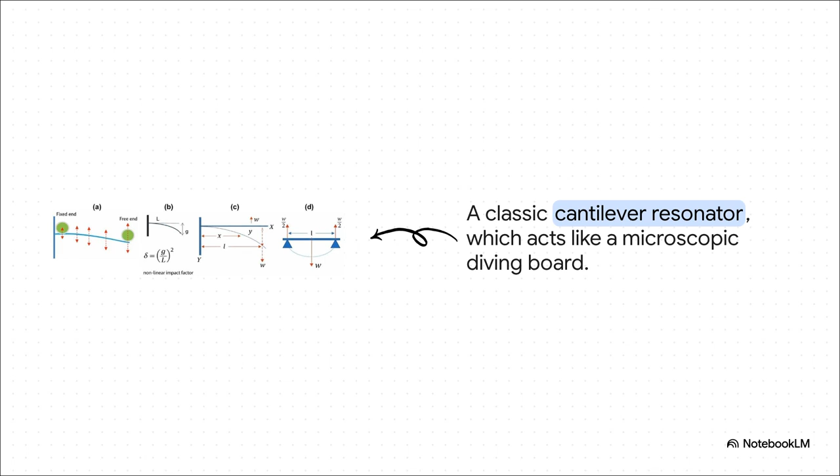For years, a lot of these sensors were built using what's called a cantilever design. The easiest way to picture it is to think of a microscopic diving board, just a tiny little beam that's fixed on one end and free to vibrate on the other. And right there, that's the problem.

Just like a real diving board, which bends and flexes the most right at the tip, a cantilever resonator's sensitivity isn't uniform at all. The vibration is way stronger at the free end. So a particle that lands there gives a totally different reading than one that lands closer to the base, and that leads to inconsistent, unreliable measurements.

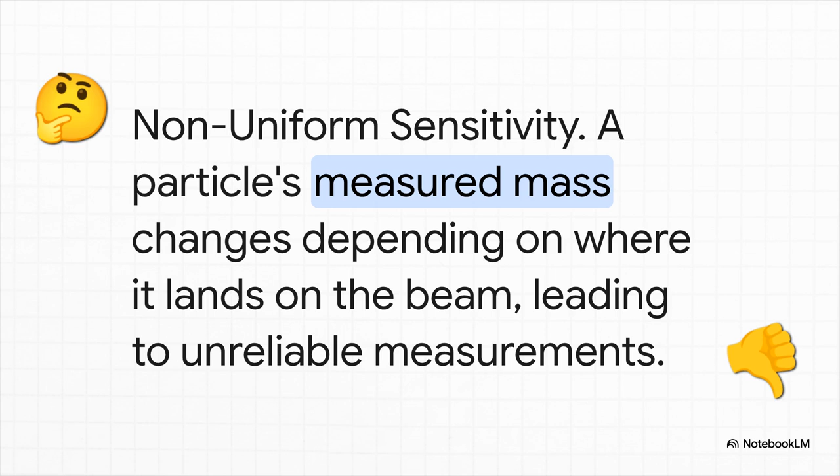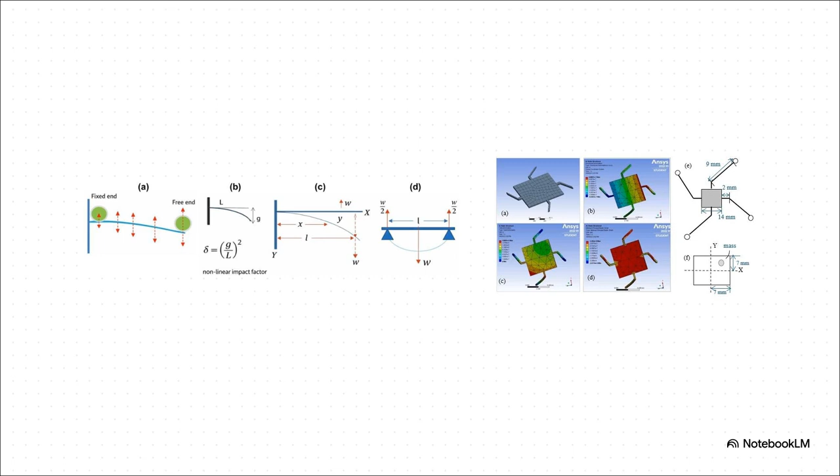Not good. So to make a sensor that was actually accurate and reliable, engineers had to go back to the drawing board. They needed to completely rethink the geometry to get something that was uniformly sensitive across its entire surface. And here, you can see that evolution right in front of you. On the left, you've got the old cantilever design. And on the right, well, that's the ingenious solution, the pedestal resonator. It is a complete game changer.

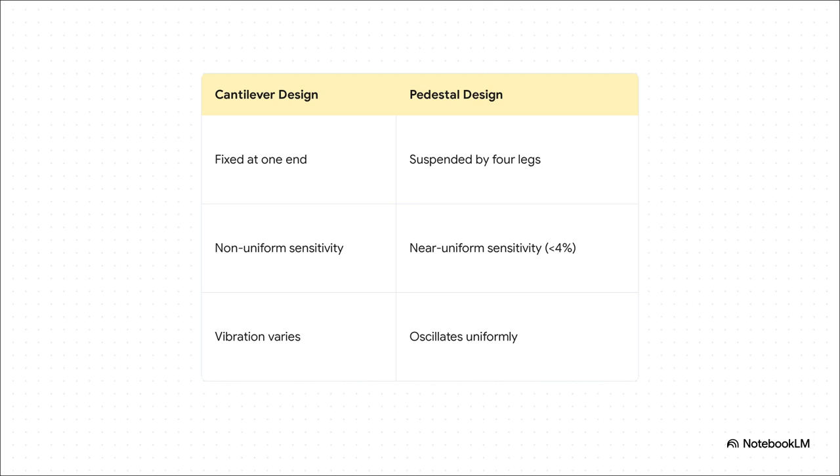So instead of that simple beam, the pedestal design has this central platform, and it's suspended by 4 flexible legs. This is a brilliant change because it means the entire platform oscillates. It moves up and down as one single uniform unit. This super elegant shift in geometry completely solves that problem of uneven sensitivity. We're talking a variation of less than 4% across the whole surface. Incredible.

Okay, so you've got this great design on paper. That's one thing. But how in the world do you actually test it and tweak it and prove that it works when the thing you're building is thousands of times smaller than a grain of sand and costs a small fortune just to make one? And this is where the hero of our story really comes in. Finite element modeling, or FEM. It is the key that unlocks our ability to actually design and test things at the nanoscale.

You should think of FEM as creating a perfect digital twin of a physical object. It's this incredibly powerful method that lets scientists simulate exactly how a design is going to react to real-world forces. Things like vibration, heat, stress, all inside a computer, without ever having to build a single physical prototype.

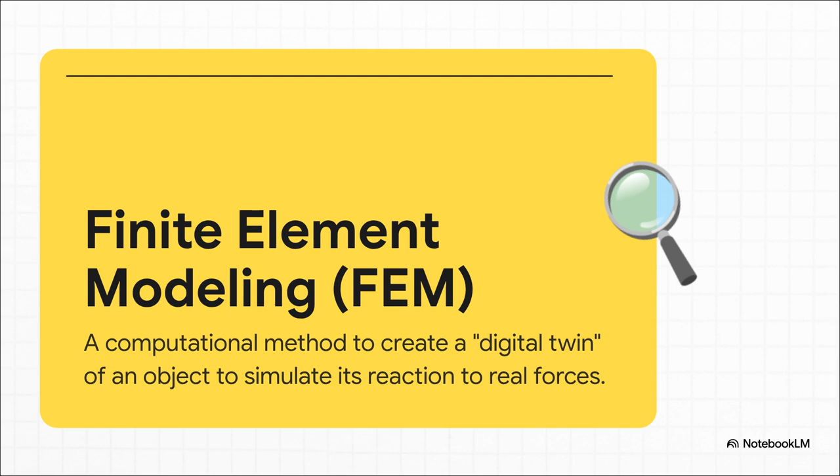The whole process is really systematic. So first, engineers create this super detailed 3D model of the design, in our case, the pedestal resonator. Then, the software slices that model up into a fine mesh of thousands, sometimes millions of tiny little pieces. These are called finite elements. And finally, they apply virtual forces, tell the computer what the material is made of, and then just let it analyze how every single one of those elements reacts.

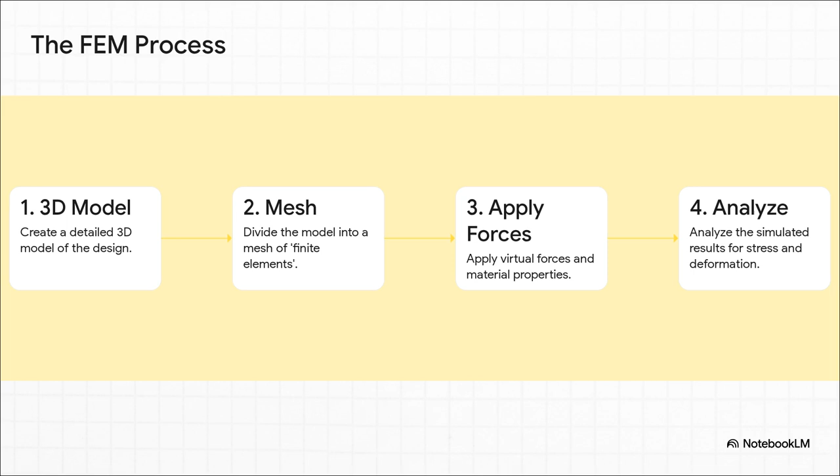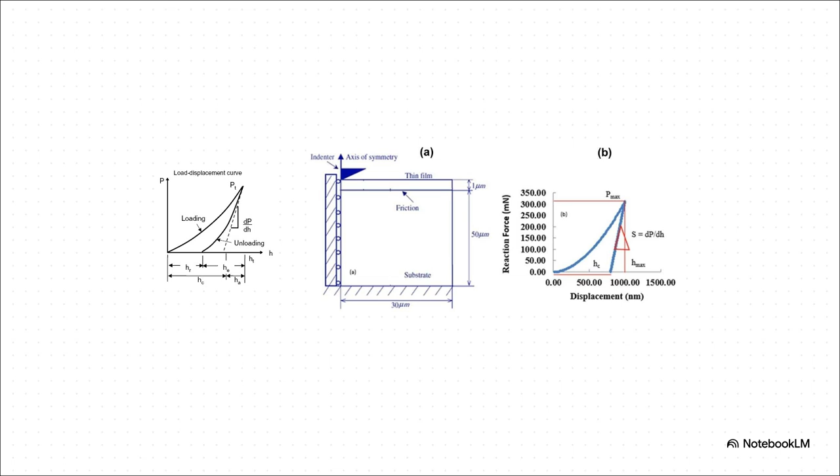Now this slide really shows you just how powerful this technique is. This load displacement curve basically shows how a material bends when you push on it. On the left, that's the theoretical curve. It's what all the math says should happen. And on the right, that's the result from the FEM simulation. I mean, look at them. They are a near-perfect match. It proves the simulation can accurately predict real-world physics.

But FEM isn't just for testing if a design works. It's also this incredible tool for understanding exactly how and, more importantly, why materials break when you put them under extreme stress. To really push a material to its limits, scientists use a method called nano-indentation. It is basically what it sounds like. They poke the surface of a special coating with an impossibly sharp, diamond-hard tip to see just how much force it can take before it cracks or fails completely.

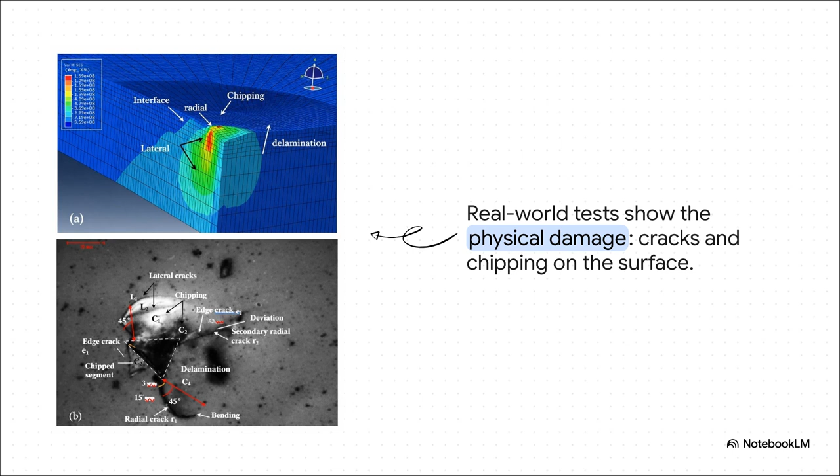And this is where the power of FEM becomes crystal clear. This is the simulation that corresponds to that physical test. The colorful map is showing you all the invisible stress fields building up inside the material, with red being the areas of highest stress. It reveals exactly where those cracks are going to form, predicting the chipping and delamination before it even happens. It doesn't just show us what happened, it tells us why it failed.

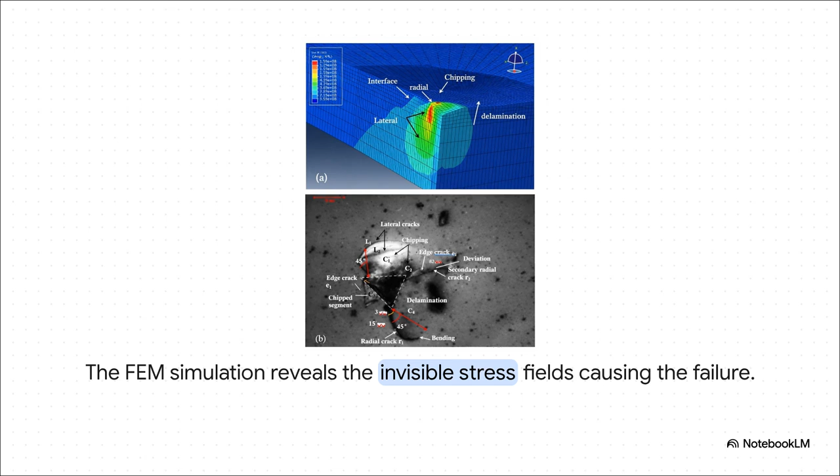And the simulation can get even more granular than that. It can tell the difference between different types of stress. So the vertical force, that's compressive stress. It's just pushing down. But as the simulation shows, it's often the horizontal shear stress that causes the real damage, the force that pushes sideways and causes the coating to peel right off. FEM lets us see all these distinct forces at play.

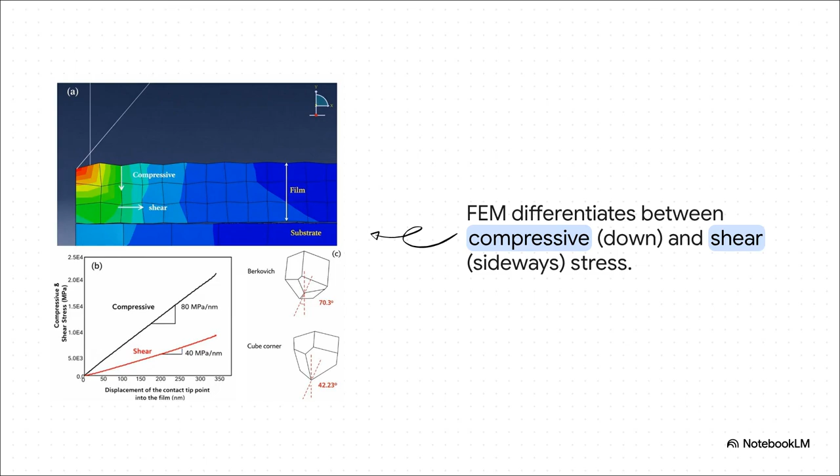So what you have is this amazing combination of clever new designs and incredibly powerful predictive simulations. And with those two things, researchers are just accelerating the development of next-generation nanotechnology like never before. And as the source material itself concludes, it's this constant feedback loop between the virtual simulation and physical reality. That's what bridges the gap between a great idea on a whiteboard and a real functional device that can actually go out and change the world.

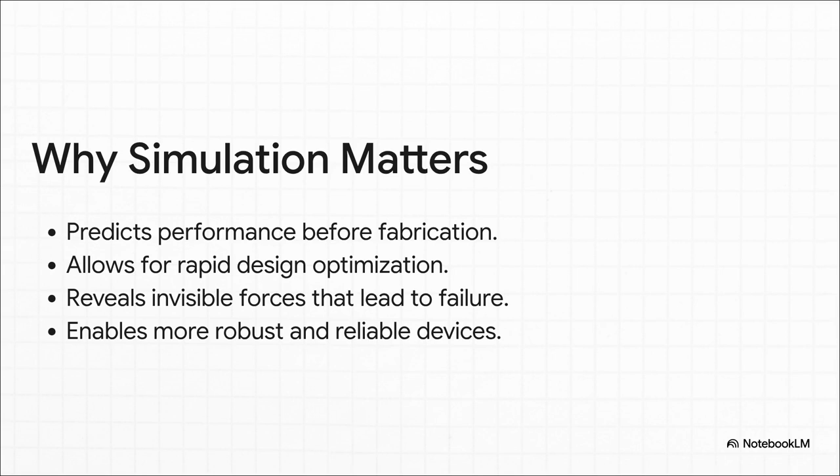So the key takeaway here is that simulation is totally transforming engineering. It lets researchers predict performance, rapidly test and fine-tune new ideas, literally see the invisible forces that cause things to break, and ultimately build better, stronger, and more reliable devices, and do it faster and cheaper than was ever possible before. And that kind of leaves us with this fascinating final thought to chew on.

As these digital twins, these simulations become so accurate that they're basically indistinguishable from reality, what does that mean for the future of scientific discovery? What even is the role of the physical lab at that point?